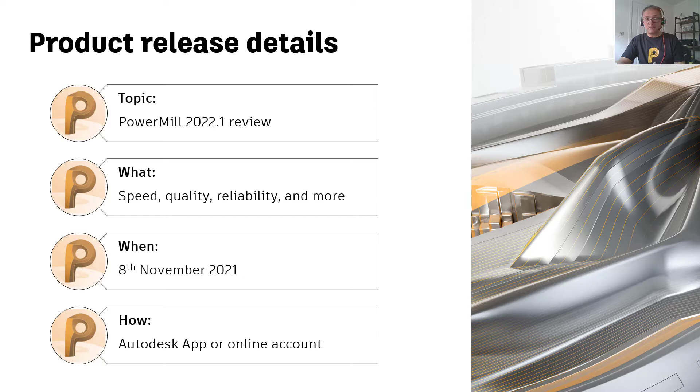Now, continuing the theme of recent releases of PowerMill, this release includes a mixture of fixes, improvements, and new functionality, all designed to improve PowerMill's performance in terms of speed, quality, and reliability. So let's dig into it and take a look at some of the major highlights in this particular release. Now, I've picked out 6 of my personal favorites. There are more, we're going to cover more of them later, but these are what I think to be the 6 most impactful improvements for you, our PowerMill users.

The first is the ability to carry out NC program and toolpath verification commands as background processes. The second is the option to control projection ranges when creating projection finishing toolpaths. Third is some improvements that we put in to speed up the time taken to load the toolpath settings form. Still on the subject of speed, we have improved model preparation, which will have a positive impact on many areas of PowerMill's toolpath creation commands. Next is some small but significant improvements we put into PowerMill's toolpath limiting functionality.

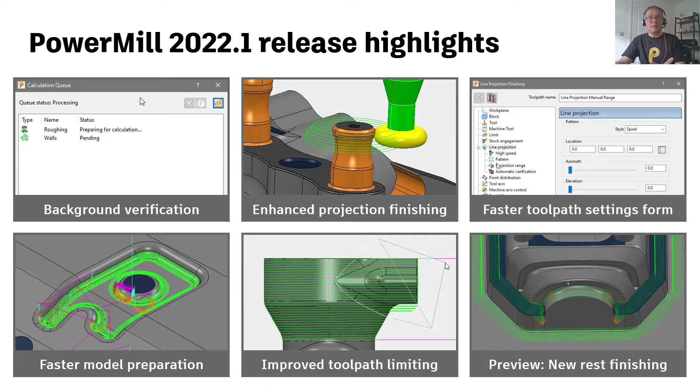And then finally, I'm really excited to show you an early preview of a completely new rest finishing strategy that we're looking to release in a future version of PowerMill. And this is preview functionality, so remember that safe harbor statement I mentioned before. So let's take a deeper dive into each of these 6 features, and then we'll look at some of the broader functionality improvements later on.

So first of all, let's look at background NC program and toolpath verification. Now, for quite some time, PowerMill has provided the ability for you to queue certain commands. So if you're calculating a toolpath, you can either calculate it in the foreground, in which case all of PowerMill's processing power is consumed, meaning you can do nothing else. Or alternatively, you can send the calculation to a background process, which means that whilst that process is running, you are able to continue to interact with PowerMill and create more CAM programming tasks.

We've extended this concept of background processing in this release to include NC program and toolpath verification. So this is the ability to check NC programs and toolpaths for things like collisions, gouges, exceeding machine tool axis travel limits, and so on. Now, by queuing this process to the background, PowerMill remains active. So there's still PC resources available, allowing you to continue with other CAM programming tasks.

Whereas in previous versions of PowerMill, the verification could only be carried out in the foreground, meaning that PowerMill would be sat there consuming 100% of your PC's resources, meaning you could do nothing else with PowerMill. And that would be a big waste of your time. So the potential impact here is clear and huge, as you can now verify toolpaths and NC programs in the background and continue with other activities. So that's an obvious benefit.

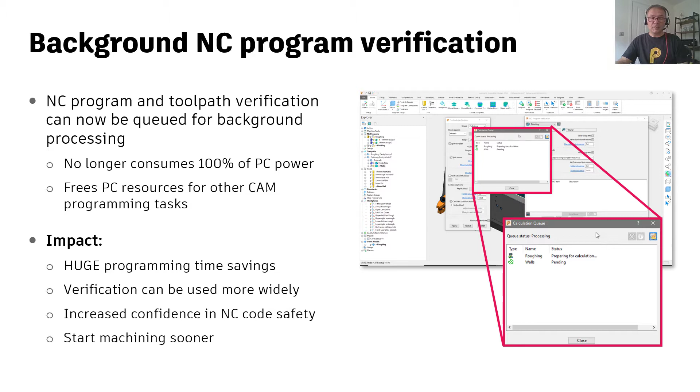Moving on, the next thing I'd like to talk about is some improvements we've made to our projection finishing toolpaths. Now, the previous release of PowerMill, that's 2022.0, included new user interface options that allow you to manually define and control projection range limits for curve and surface projection finishing toolpaths. This latest release extends these options to apply to line, point, and plane finishing projection toolpaths too.

Now, the use of projection ranges provides more programming control and can help you create toolpaths that machine only the areas that you want to, whilst avoiding over machining any other surrounding or shielding geometry. And the images that you can see on the right hand side of the screen here really show this beautifully. The image in the top right corner shows the machining of a cylindrical feature on a larger automotive component.

We've used line projection finishing here, and because projection finishing works from the outside of the model inwards, unfortunately, you can see that there are areas of surrounding geometry that have been included in the toolpath. That's not correct. We don't want the toolpath to machine those features.

By using manual range projection limits, we're now able to limit the toolpath just to work in the area of interest, meaning we create the right toolpath, avoiding the need for any additional toolpath editing or limiting or even alternative strategies. This means we get the right toolpath first time, allowing us to reduce CAM programming time and produce your parts sooner.

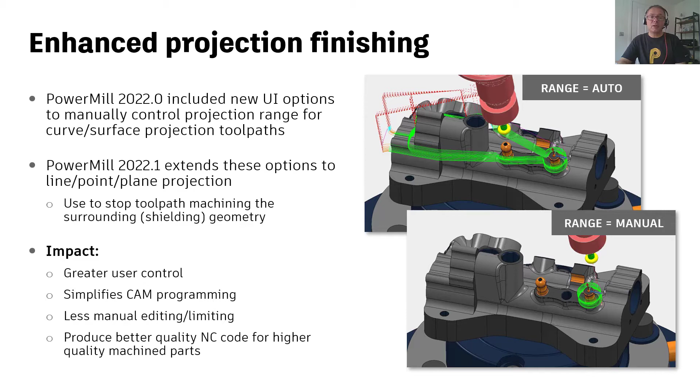The next thing I'd like to talk about is some improvements that we've made to PowerMill's toolpath settings form. Now, this is one of the most commonly accessed parts of PowerMill's interface. And what we've noticed is that this form has got slower over the last few years. And that's for good reason. The form contains more data, more settings, more information, and so it has become bigger and therefore has taken progressively longer for the form to open.

But based on customer feedback, we realized that the time had come to make this form faster. Now, in our tests, we believe that the toolpath settings form is now typically 65% faster than previous releases. But we have had experiences with beta customers that have reported even bigger time savings.

And one I wanted to point out was from one of our large automotive customers in the Far East, who complained justifiably that their large projects, so in this case it's 5.7 gigabytes with lots of stock models and toolpaths, resulted in a form load time of 12 seconds. Understandably, they were not happy with this, but they hopefully will be happy that in this latest release, typical load times for them have reduced to less than a second. That's a 90% time saving.

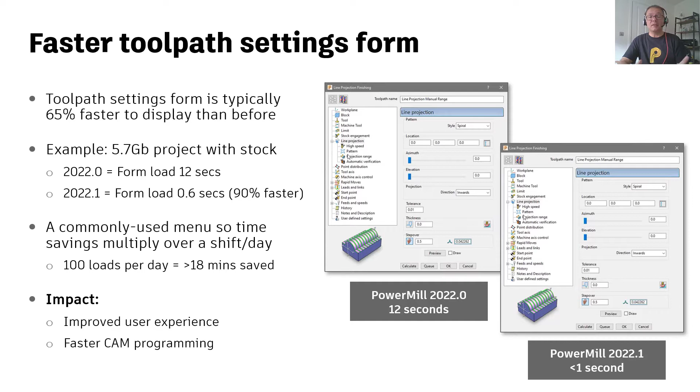Now, I want to show you a side-by-side video that shows this in action on a different data set. And the PC that we've used to carry out these tests is shown on screen now. It's a Lenovo ThinkPad P71 laptop with quad-core Intel chips, 64 gig of RAM, and an NVIDIA Quadro graphics card. So a reasonable spec PC, certainly not the best that you can buy on the market today.

Okay, so this slide shows two versions of PowerMill running side by side. PowerMill 2021.0 on the left and PowerMill 2022.1, the latest release, running on the right. Now we're going to watch this video again in a second because it happens quite quickly, but what's clear to see is that the toolpath settings form is faster on the latest release.

Now I'm going to play this video again, and I want you to pay attention to the PowerMill 2022.1 that you can see on the right hand side of the screen. Notice that in the latest release, the toolpath settings form has appeared. We click Calculate. The toolpath calculates, the form is closed, the command is complete. And all of that happens in less time than it took PowerMill 2021.0 just to open the form.

So on this data set, on this particular PC, you can see some significant time savings to be had, and the cumulative effect over a shift or a day or a week could be huge.

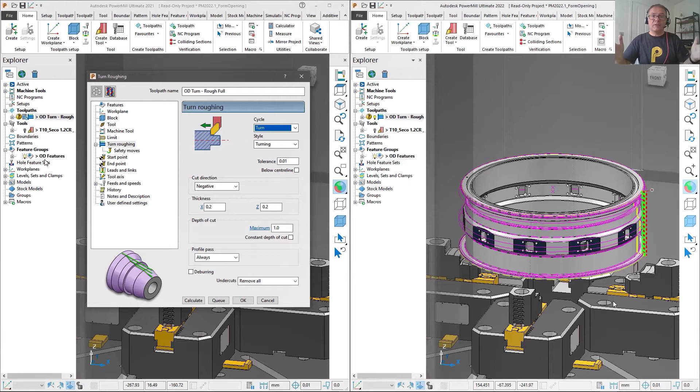So these are huge time savings, and don't forget, you might see even more, such as our automotive customer in our beta program who reported 90% time savings.

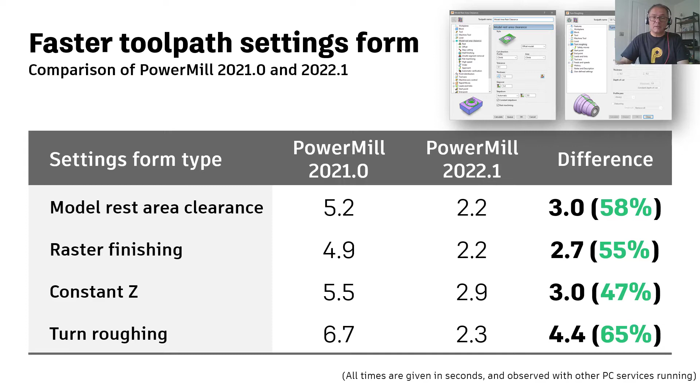Now, I just want to change tack slightly and still on the subject of speed, talk about improvements that we've made to PowerMill's model preparation. Now, you might be wondering, what is model preparation? It's an integral part of many toolpath-related processes. So if you've ever watched the progress bar at the bottom of PowerMill's main display when you've been calculating a toolpath, you may have seen text appearing that states scanning model or preparing model.

Now, this is one small part of the overall algorithm or process that we go through in order to complete that task. And we've realized that this is an area where we could get improvements in terms of speed. And so PowerMill 2022.1 has had significant effort put in to speed up that model preparation. But how does that impact you and your daily experience of PowerMill?

Well, model preparation is an integral part of processes like toolpath calculation, toolpath editing, and even if you edit a toolpath's leads and links, meaning this improvement should affect all of those common tasks. And in our tests, we've seen the biggest gains happen when editing toolpaths, specifically if editing toolpaths that machine large parts or if toolpaths use very small tolerances.

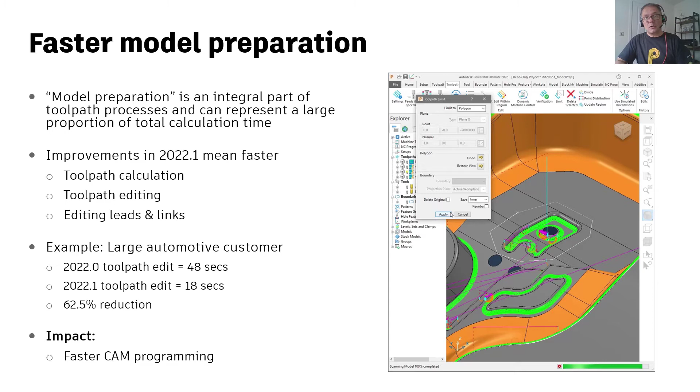And in our tests using actual customer data from one of our largest automotive customers in the Far East, we've seen model preparation times reduce from 48 seconds in the previous release of PowerMill to 18 seconds in this latest release. That's a saving of 30 seconds or 62%. So the obvious impact here is time, saving you time so that you can start your CNC machining tasks sooner.

Now, the video on screen compares the time taken to edit a corner finishing toolpath using polygon sketched limiting. As before, we can see PowerMill 2021.0 on the left and PowerMill 2022.1 on the right. And you can see that we've taken this toolpath and we're sketching a polygon to define a region of toolpath that we wish to preserve. Once both regions are defined in both versions of PowerMill, we simply click Apply. You can see us clicking the Apply shortly to start the command.

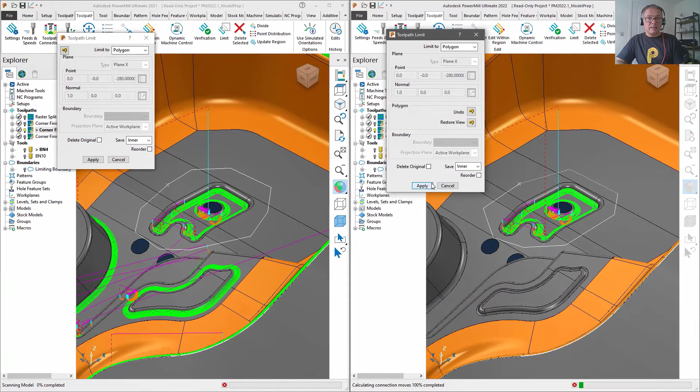Now, we've started PowerMill 2021 first to give it a bit of a head start, and then we click Apply for PowerMill 2022.1. Note at the bottom of the screen the text Scanning Model is appearing to tell us that PowerMill is in the middle of preparing the model data. What's very interesting is to see that PowerMill 2022.1 completes the command faster. It then applies the leads and links, and the form is closed down and the command is complete. And shortly thereafter, you can see PowerMill 2021 catches up, finishes its command. It is also complete, but it happened a little bit slower.

Now, the results of that test on this large press tool die measuring 2000 millimeters in X, 1300 millimeters in Y, and 560 millimeters in Z is that we've saved 16% overall calculation time on this one task. And remember, this was taking a multi-pencil finishing toolpath that was calculated to a very tight tolerance and limiting it to isolate a small region.

So we've saved 16% of our calculation time on this one particular process, but don't forget we've seen bigger time savings in other data sets, and you may see bigger time savings too using your own data on your own PC.

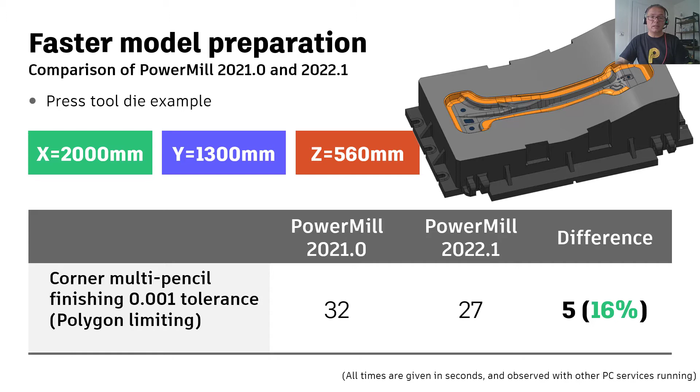Okay, still talking about toolpath editing, I'd like to talk about some improvements that we've put into PowerMill's toolpath limiting functionality. Now, as we've just seen, the ability to limit a toolpath is arguably one of PowerMill's most powerful features, and it's certainly one that I know many of you use on a regular basis. Now, with the release of PowerMill 2022.1, we've introduced two small but significant improvements to usability.

The first is the introduction of a new rubber band preview, and you can see this appearing on screen now. As we click the points to define the polygon we wish to use for limiting, my cursor has a rubber band preview attached to it.

This helps me to visualize the areas of the toolpath that we will be limiting, either to preserve or remove. Now, the second improvement we've put into PowerMill for toolpath limiting is a new Restore View button. You can see that we've accidentally rotated the view out of the orientation that we had at the start of the command. Returning that view to its original setting would be difficult, possibly very, very challenging, maybe even impossible.

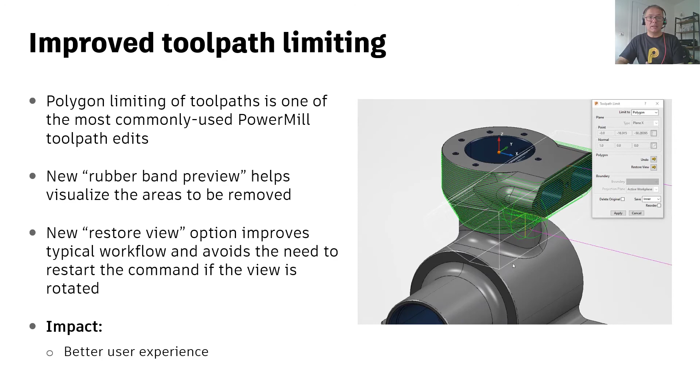But the new Restore View button, as the name suggests, simply resets the view back the way it was, allowing me to continue my command, saving me time, saving me hard work and effort. So collectively, these two improvements will have an impact on your general day-to-day user experience of toolpath limiting.

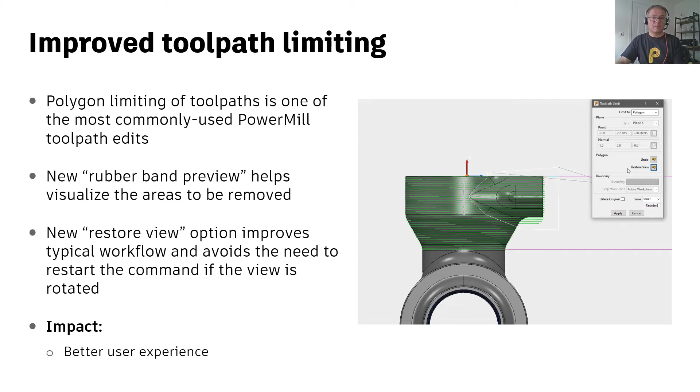Effectively, we have run a macro, and PowerMill has looked at that macro and identified that it's got commands that are hazardous. And it presents three options. Either we can trust the macro and allow it to run, we can not trust it, so the macro will be blocked, or we can inspect the macro to check its contents line by line.

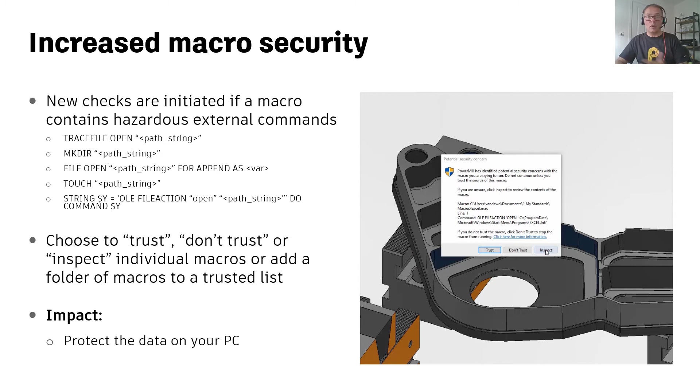The point is, these commands could be a potential loophole to expose vulnerabilities to the data in your network. And so now these security checks will give you a greater confidence that you're protecting your data. Now, you can choose to approve and trust macros one by one each time you run them, or alternatively, you can predefine a folder containing multiple macros and they will all be trusted in one command, saving you yet more time.

Now, moving on, for a number of years, PowerMill has provided specialized capabilities for those of you driving additive manufacturing processes, such as directed energy deposition, or DED, or even fused filament fabrication, FFF. Now, with the release of PowerMill 2022.0 earlier this year, we introduced a feature to drive toolpath efficiency whereby the profile and raster infill toolpath segments could be combined together into a single, safe and efficient toolpath type.

But at that point in time, this could only be used in cases where your base surface was planar or cylindrical. PowerMill 2022.1 builds on this and now allows you to build features using that same combined profile and raster infill toolpath on any base shape. So that now includes general surfaces of revolution or indeed any arbitrary form. Now, this greatly increases your choice of CAM programming and should result in your ability to create highly efficient toolpaths that can produce a much greater range of parts.

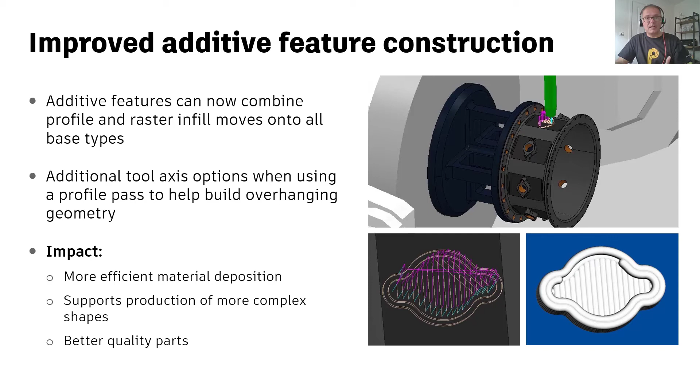Now, the second improvement relates to tool axis controls when building parts with profiling toolpaths. It's a difficult thing for me to explain. It's much easier to show you a video. So let's start that video now. Now you can see here we've generated a toolpath that's profiling around a form, but because the form contains overhanging geometry, it would be better for us if we can deposit that form with the tool axis aligned to point the material directly onto the previous layer of material that was deposited beforehand.

So that's the improvement that we've included. You're now able to derive the tool axis of your DED toolpaths such that they deposit material more effectively based on the previous slices. What's the impact of these two improvements? Well, it allows you to produce more efficient strategies that deposit material in a more efficient way. Clearly, it allows you to produce more complex geometries, such as parts with overhanging forms, and ultimately allows you to produce better quality additive manufactured parts.

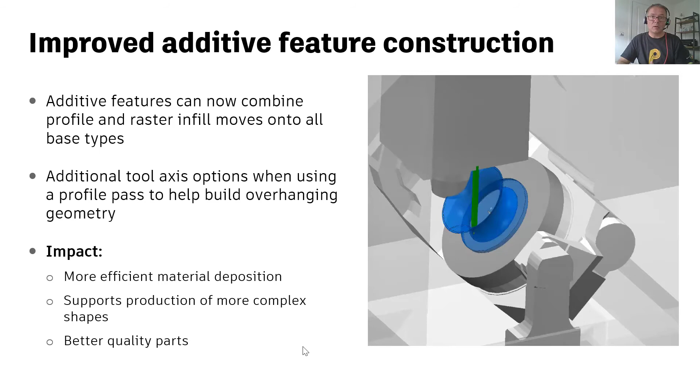Now, moving on, the next feature we're going to touch on here relates to better machine motion when using orientation vectors. Now, some of you may not be using orientation vectors, and so this will be completely new to you. Those of you that are using orientation vectors, I hope you're going to see a positive benefit from this latest update. Either way, let's cover what orientation vectors are and how this improvement benefits you.

Well, when creating toolpaths for use on multi-axis machines, orientation vectors can optionally be used to control the way the rotary axes behave. Now, this is especially useful in cases where the machine could choose multiple configurations or solutions to achieve the same machine position. Think about driving an industrial robot. It could be that the robot itself can orientate its various different members in different ways and yet still position the tool at the same point in space with the same tool axis relative to the workpiece.

But this is also applicable on a standard 5-axis machine with a table-table configuration. The table of the machine could rotate away from the operator or towards the operator, and just by spinning the C-axis one way or the other, you can still achieve the same tool relative to the workpiece. Now, both of those are valid solutions, but the chances are you would rather choose one, maybe to make it easier for the operator to see the workpiece, certainly not leave it to chance. And so it's here where orientation vectors can help.

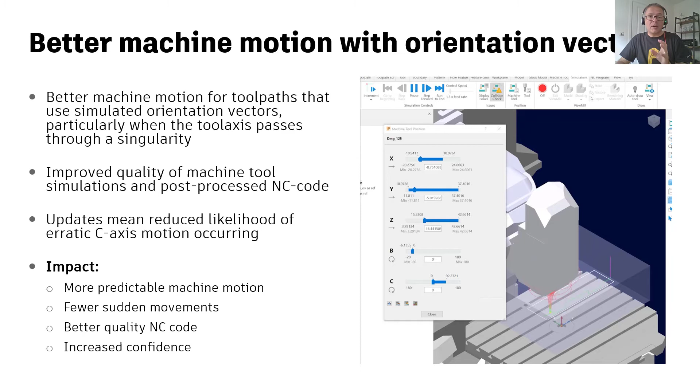Now, this is achieved by activating the Use Simulated Orientations option that is available in the Toolpath Edit section of the PowerMill ribbon. You activate these options, simulate the toolpath, and what you see in the simulation will be what is exported and post-processed to your CNC machine tool. So it's a what you see is what you get approach.

This latest release of PowerMill 2022.1 includes enhancements that improve the consistency of the orientation vectors that are calculated during the simulation part of this process. And if you're using orientation vectors, you should see a noticeable improvement in the motion of the machine with less erratic motion in situations where the toolpath passes through an axis singularity. So as well as improving the motion of the virtual machine simulation, the improved orientation vectors will be transferred out, resulting in better quality motion after post-processing for your CNC machine tool.

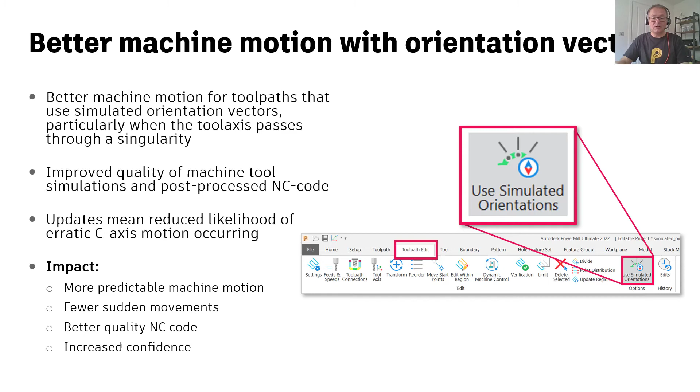Now, it's easier to see this with a visual example. So here, we're simulating a small section of a 5-axis toolpath that's machining a customer part. Now, it's worth noting we've removed the CAD model on purpose just because we've signed a non-disclosure agreement with this customer and we don't want to break that agreement.

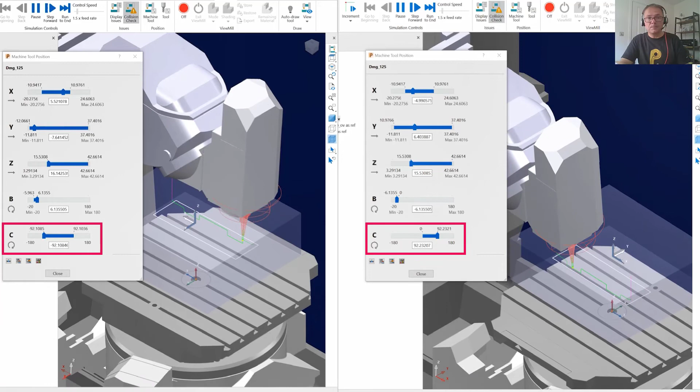Now, for various reasons, the shape of the model, the position of the model on the machine tool, we can see that the toolpath contains orientations that get very close to an axis singularity. That's where the Z-axis of the machine is very close to being coaxially aligned with the C-axis of the machine. And that can result in sudden erratic movements of the C-axis. And we can see that on the left-hand side of the screen if we look at PowerMill 2022.0, notice how the toolpath is flipping the C-axis on multiple occasions.

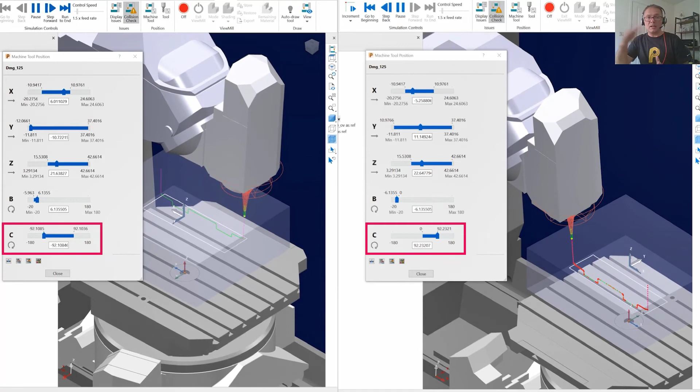Look very carefully at the C range highlighted by the red box, and you can see we're transitioning from minus 90 degrees to 0 degrees to plus 90 degrees, back to 0 degrees, minus 90 degrees, and so on. So the C-axis is flipping positive, negative, positive, negative. Now compare that on the right-hand side of the screen with PowerMill 2022.1, we can see the range of movement on the C-axis is much smaller. Once the machine positions the C-axis into the plus 90 degrees orientation, it stays there. So the C-axis is no longer flipping from side to side.

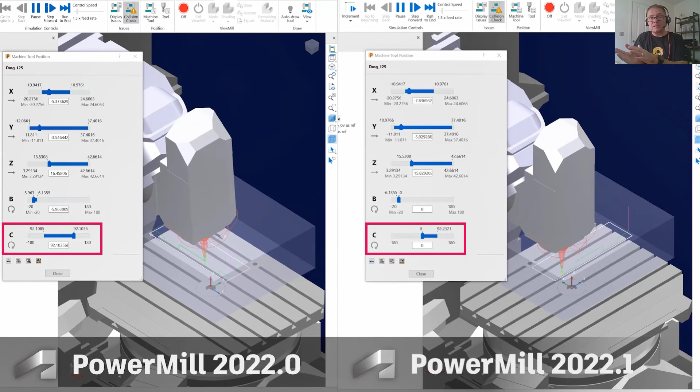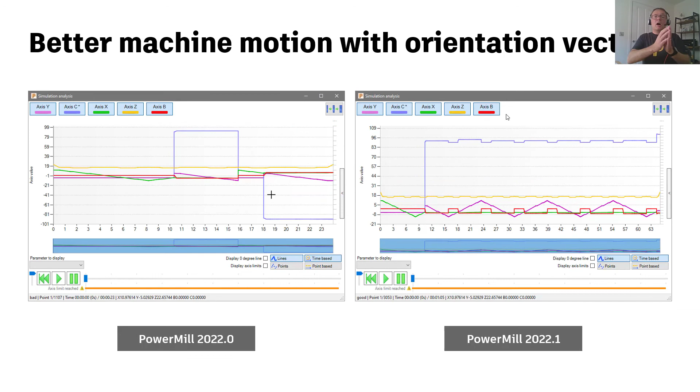And we can see that even more clearly if we look at a plot of the individual axis motion. If we display the plot for the C-axis in PowerMill 2022.0, and you can see the C-axis is this blue-purple line, notice how the line goes from 0 degrees to plus 90, to 0 degrees to minus 90, to 0 degrees to plus 90. It's up and down and up and down. Whereas, if we look at the whole toolpath in PowerMill 2022.1, you could see that the machine goes from 0 degrees to 90 degrees and then stays in that 90 degree zone.

So there's much less movement of the C-axis of the machine, and the impact here is clear to see. Less movement of the machine results in a faster machining cycle time because the machine doesn't have to move so much. There could be an improvement in surface finish. There's also going to be a small improvement in the long-term maintenance cost of your machine because you're using the C-axis more effectively.

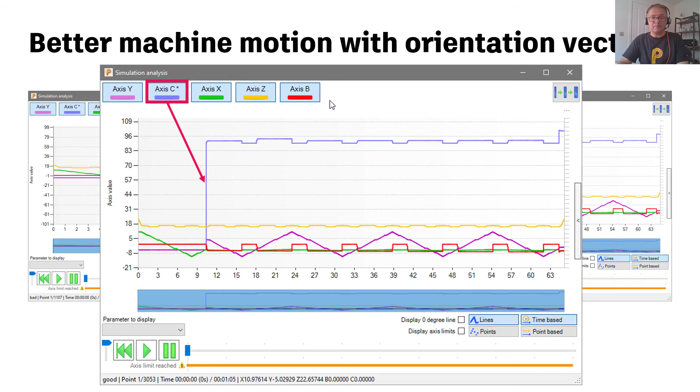Now, this last feature that we're going to talk about today is one that I'm particularly excited about because it relates to a completely new toolpath type, specifically aimed at improving the way we machine rest material. Now, before we go too far, it's important to stress that this feature is being released in preview mode. It is not a fully released feature yet. So remember that safe harbor statement that I mentioned earlier.

Now, even so, we believe the functionality has reached a point where it is usable, and we wanted to reveal it to you through preview so that you can start to use it yourself. And hopefully, provide feedback to Autodesk through the usual ways, so the user forum, so that we can then work on this algorithm to make it better and release it in the very, very near future.

So let's just take a step back. What do we mean by rest material? Well, in simple terms, this is material that's left unmachined on parts simply because we've used larger cutting tools or roughing strategies that were unable to fully machine the entire component. So think about the bottoms of pockets and the material that will be left in those pockets by large cutting tools. Now, PowerMill provides multiple different ways of machining this rest material.

Strategies like pencil finishing, multi-pencil finishing, corner finishing, and even the use of rest boundaries all aim to help find and remove this rest material safely and efficiently. Now, while these strategies have their own strengths, they also have their weaknesses, and there may be cases where material is left unmachined by one strategy and you'd need to go and remove it using another, and that's clearly not ideal.

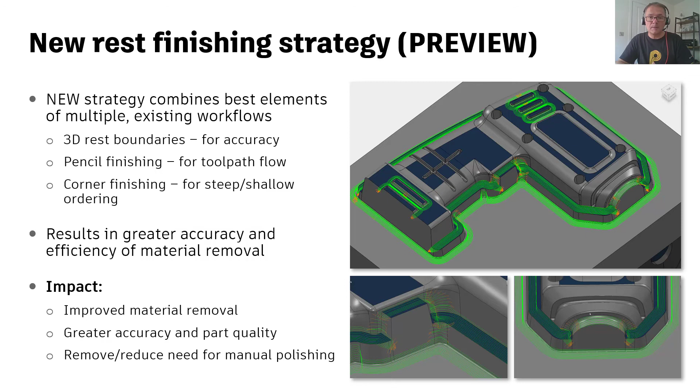Notice also the shape of the toolpath segments. See how it's flowing in steep areas and it's flowing in shallow areas in a very different way. So it's a safe and efficient way to remove that stock. And as you would expect, this toolpath will be configurable using a variety of different settings with independent controls over the behavior in steep and shallow regions.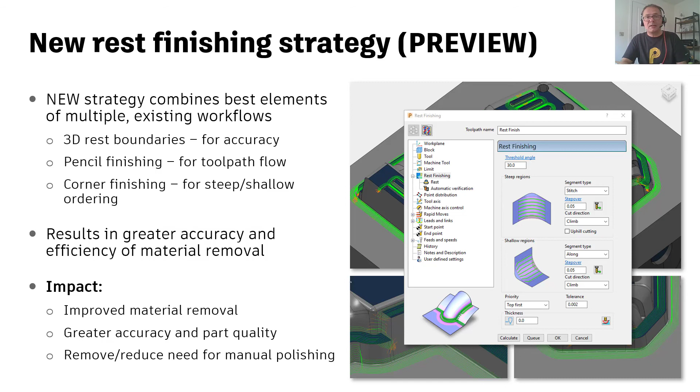This new rest finishing strategy has already been tested in our beta program for quite some time, and we've reached a point where we really feel confident that the strategy is usable, and so we encourage you to use it and provide feedback to us through the user forum. And once we're happy with the quality and we've improved the code even further, we'll be excited to release it in the very near future.

So, just to summarize, this latest release of PowerMill sees multiple improvements to help you get more from your 3 and 5 axis CNC machines and cutting tools, including the ability to background process NC program and toolpath verification, improved controls over projection finishing toolpaths, faster toolpath settings forms, faster model preparation for toolpath editing, improved usability for toolpath limiting, and that really exciting new rest finishing toolpath that we showed you on preview.

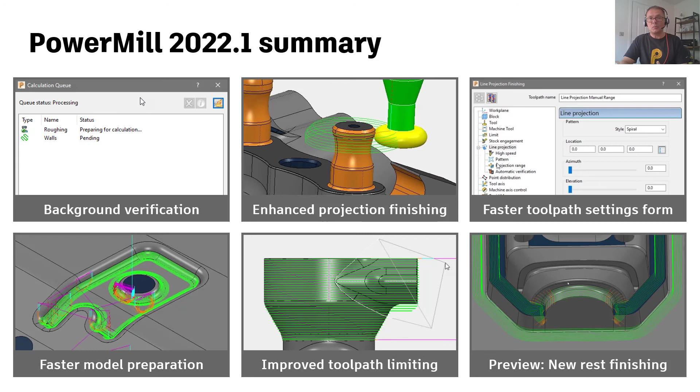But it doesn't end there. There's more improvements inside PowerMill than just those 6 or 7 features. So in addition to these major highlights, we've also included a host of fixes and other smaller but equally important improvements that all have a positive impact on performance and reliability. So PowerMill 2022.1 is better because it provides new post-processing options to now display all valid option file types within the post-processor interface and not just those files with the .opt extension.

PowerMill is better because it includes updated user documentation, specifically covering some of the more advanced elements of PowerMill, like orientation vectors, some of those things we were talking about earlier today. PowerMill is also better at detecting and processing badly trimmed surfaces.

Now, if you've ever imported a CAD model from another supplier and it contains small or poorly trimmed surfaces, PowerMill can find those problematic and it can result in error commands appearing and toolpaths failing to calculate. PowerMill 2022.1 now includes a far more robust algorithm to better handle and process these problematic surfaces. Now, this should improve the robustness when importing CAD models, but also you'll see a reduced likelihood of error messages occurring when toolpaths can't be processed.

Now, not only is PowerMill better, but it is faster. We've already seen some examples of that today with faster toolpath settings form, faster model preparation, but we've also sped up the spun profile calculation time, specifically for the creation of turning toolpaths, just because we've multi-threaded this function, and now in our test we're seeing up to 30% faster calculation times.

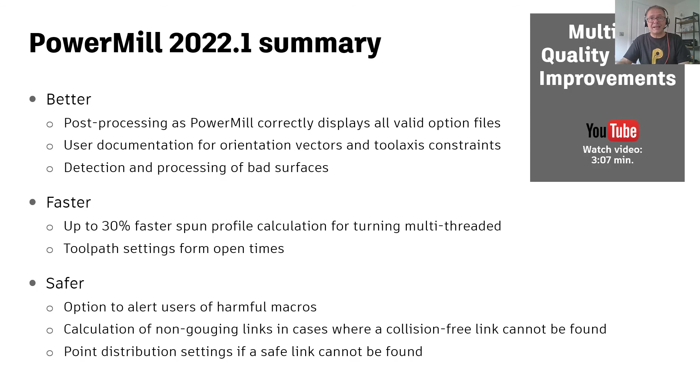So you can see this release of PowerMill includes a whole host of improvements that really will impact your day-to-day quality of life with using the PowerMill product.